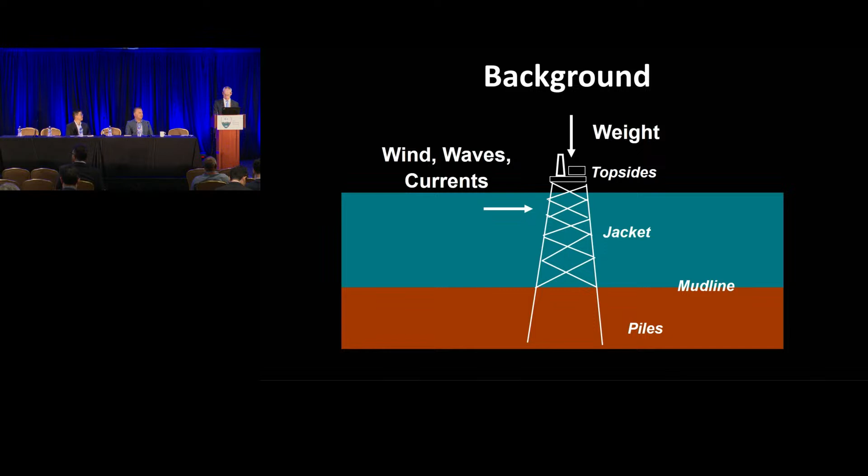Since 1992, we've had 6 hurricanes come through the Gulf of Mexico, passing through parts of the Gulf that had offshore oil and gas platforms located in them, and every one of those hurricanes had loads beyond the design load for these structures, so they're a great opportunity for us to learn how well these platforms perform.

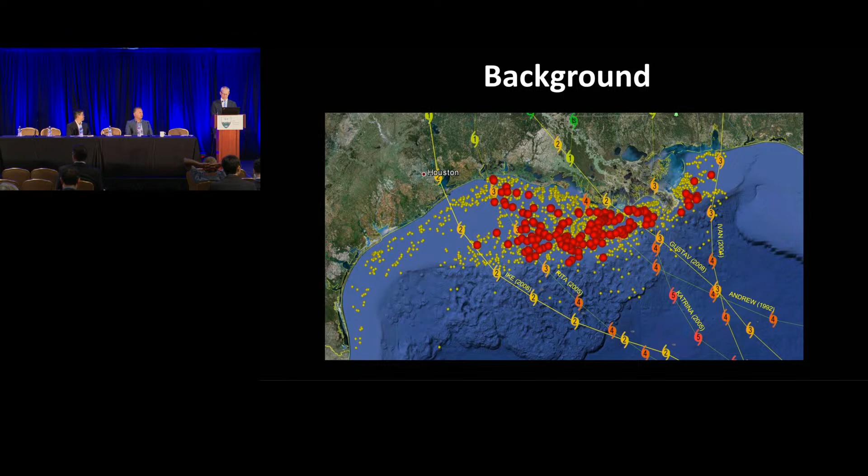So these are real failures, not notional failures. These are real failures. As many platforms as were destroyed, there are many more platforms that survived, even though they were loaded beyond what they were intended to be able to withstand.

So the whole goal of this is to learn everything we can from how these systems are performing compared to how we think they would perform based on design.

These structures are designed using 3-dimensional nonlinear finite element methods. We try to do the best we can in modeling the structure, modeling the foundation system, modeling the loads on these structures in order to design them.

Here's an example of some results from one of these finite element models. This is showing the capacity of the foundation system as an interaction curve. So if you're below that curve in a combination of base shear and overturning moment, in theory, the foundation system should be stable.

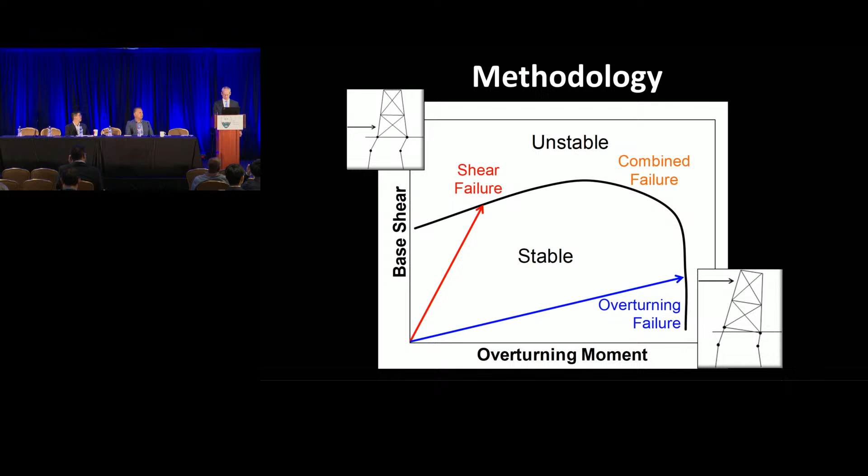Here's an example of a real case. This is a platform, an 8-pile structure that was located in Hurricane Ike in 2008. The red asterisk represents our best guess based on the hindcast data for that location as to what the maximum load was that that platform was subjected to in terms of base shear and overturning moment.

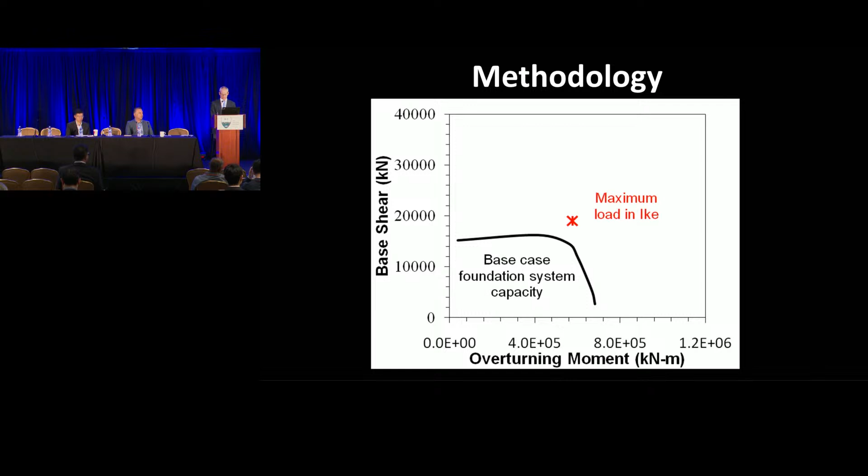And you can see where the black interaction curve is. Of course, the world is not deterministic, so each of those have a probabilistic representation, and what we would like to do is understand how what happened compares to what we think would have happened, and then to update our ability to predict the performance of these structures based on that information.

And we've got what we predict the capacity to be, using the state of practice, which is the three-dimensional nonlinear finite element modeling and all of the various models that we use for design of the foundations. We have random or aleatory variability in that capacity, so we're trying to account for that. Even though we predict what the capacity is, that doesn't mean we know exactly what the capacity is.

And there's potentially model uncertainties. Our models for, say, axial pile capacity are calibrated based on load tests, and none of those load tests have loads anywhere near the kind of loads that we have on these structures in a real hurricane.

So we're extrapolating pretty significantly from those, so there's some model, some epistemic uncertainty in what that capacity actually is. And the same thing on the load side.

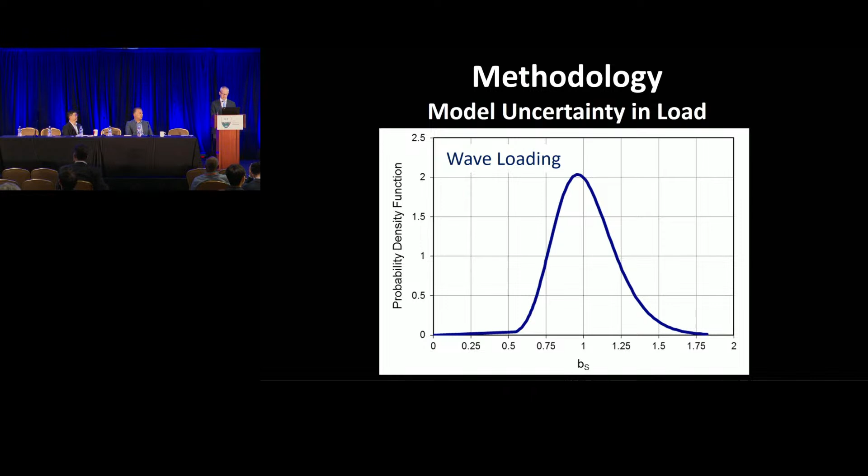And then the last step is to take what happened and update those prior distributions. Here's what that likelihood function looks like. There's about 20 platforms in different hurricanes with different modes of failure and different performances that were observed, which we're incorporating into this big equation that captures how likely it is that these observations would have happened for different sets of values of those model factors. There are 5 different model factors.

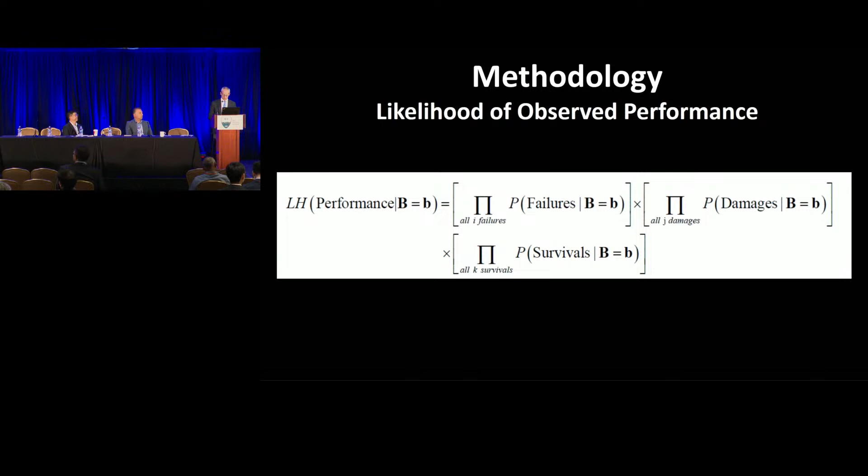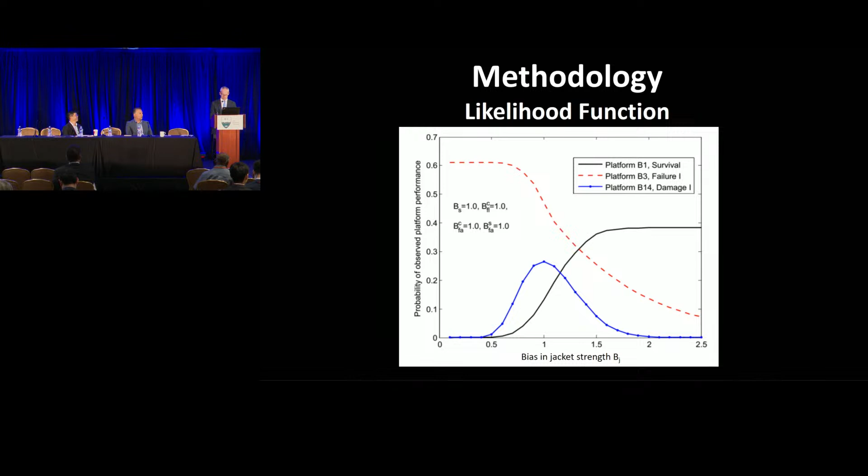And what we're doing is combining all of these together for all of the various modes, and then using Bayes' theorem to update those distributions for the model uncertainties.

But I want to point out that, remember, there's 5 factors here, and I'm just showing you one of them, so you really need to look at all of them together. Here's the jacket capacity, again looking at it all by itself. Again, we're learning more, but it seems to be about what we thought it was.

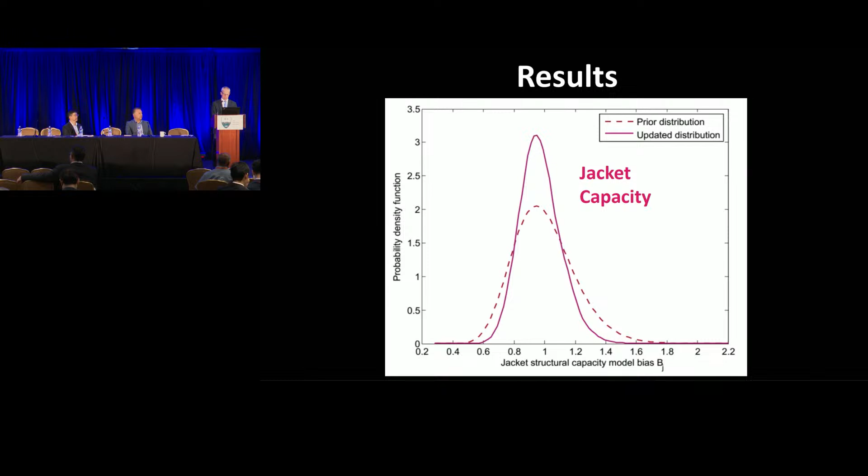Here's what we're most interested in as foundation engineers. This is foundation shear capacity. The data we have would indicate that the API method for modeling lateral pile capacity, and the way it's being used, is a bit conservative. And you can see how that updated curve has moved to the right, indicating that conservatism.

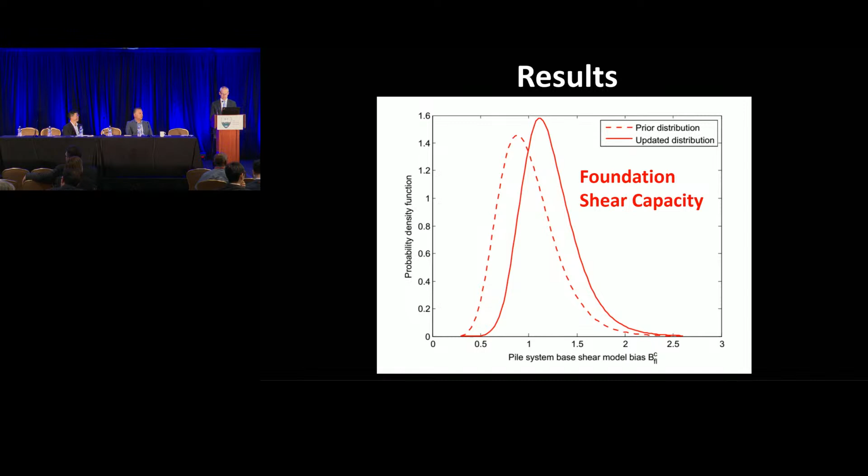Here's axial pile capacity in clay. In this particular case, it wasn't until 2008 that we finally had a failure of a pile in clay. It was a tripod, and we'll talk a bit more about the lack of redundancy in a tripod. But in that particular case, the capacity was almost exactly what we would have predicted based on the API method. It was a structure that had been out there for 5 years before it was loaded in the hurricane. So even after 5 years of aging, it still had a capacity about what we would predict using the API method. And that kind of information is reflected in that updated distribution for the bias. It's centered pretty close to 1.

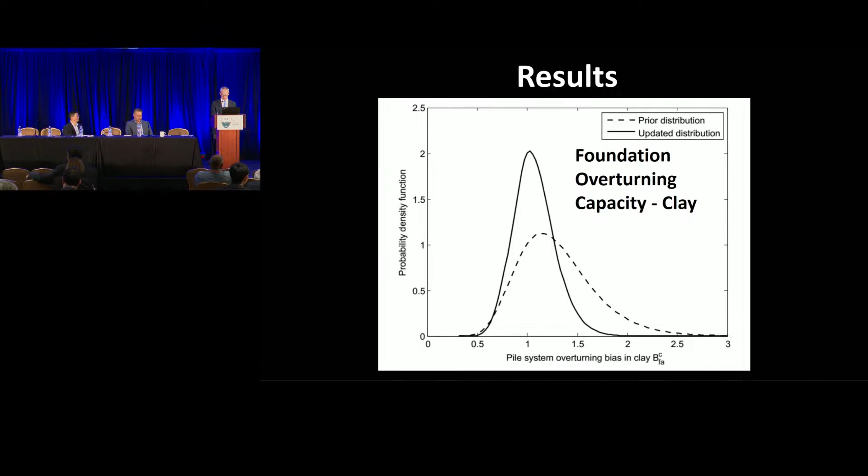I want to look at one of these cases in detail just to show you - you can look at it holistically like we have been, but every one of these is really a story in of itself, and the real value, I think, comes from looking at each one of these cases individually and understanding what happened. This is a structure that was loaded in Hurricane Ike. It's an 8-pile structure. The interaction curve would indicate, based on the standards, the state of practice, we would predict that this platform should not have survived that hurricane. It should have failed in the foundation. It did not fail in the foundation. It was still standing at the end of the hurricane.

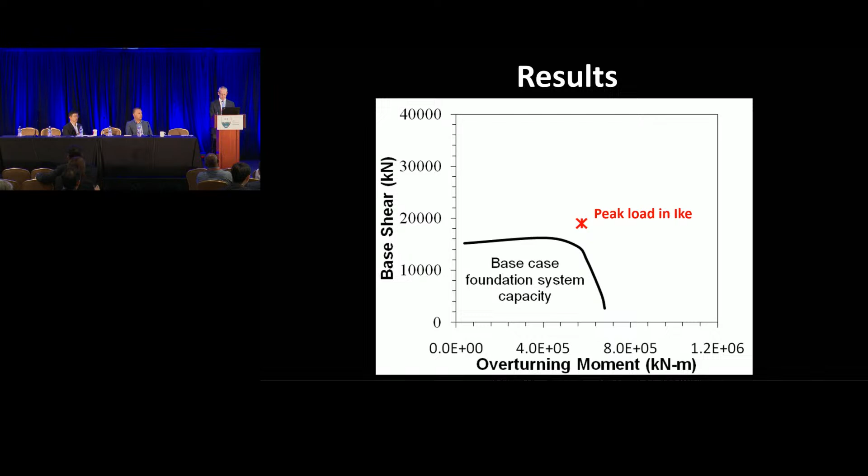So the structural engineers, when they first went to assess this platform - anytime a platform has seen something close to its design loading conditions, you have to go through an assessment process before you can put that platform back into service - in order to explain this platform having survived the hurricane, they took the geotechnical data from the site investigation and the design, and they multiplied the undrained shear strength by 3. So it would have taken like $1 million to drill the boring and do the geotechnical work and produce the report for this, and the structural engineers just multiplied everything by 3. In doing that, they could explain why the platform survived.

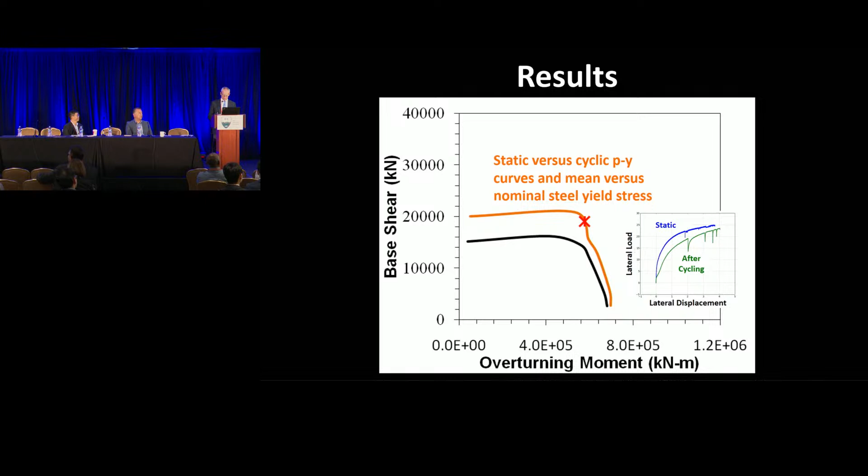But if you look carefully at this structure, first of all, they weren't using the lateral PY curves appropriately for an ultimate pushover. They were using PY curves for cyclic loading, which are really for stiffness, not for ultimate capacity. They were using a nominal yield stress for the steel of the legs and the steel pipe piles of 36 KSI, when we know, we've done lots of measurements of coupons, it's closer to 42 KSI. And so if you account for those two things, you can explain why it survived. And then if you even go further, the structural models have the structure starting at the mud line, and in reality, the legs stick down about 2 meters or 6 feet below the mud line in this structure. And if you account for those leg stubs, you can explain why this structure survived that hurricane without doing anything in multiplying the strength of the soil from the geotechnical site investigation.

So the impact of this kind of work - one is it's motivated updating methods to predict lateral and axial pile capacity. These are now being, some of them have already, some are in the process of being integrated into the offshore practice. I expect, and I already know because I'm seeing it happen, that these are going to show up in AASHTO and other design guidance that we use for all sorts of foundation applications.

Number 2, we've explained why foundations are less likely to fail than superstructures in a hurricane. There was a storyline after Hurricane Andrew that continued on until about 2010, that these platforms were over-conservative in the foundation, that geotechnical engineers were not doing a good job of design. They were being overly conservative.

That's not true. The design methodology, in the way it goes component by component and doesn't look at the whole system, it turns out that leads to, for structures that have more than 3 legs, and most of these platforms have 4, 6, or 8 legs, it's much less likely it's going to fail in the foundation just because of the design recipe.

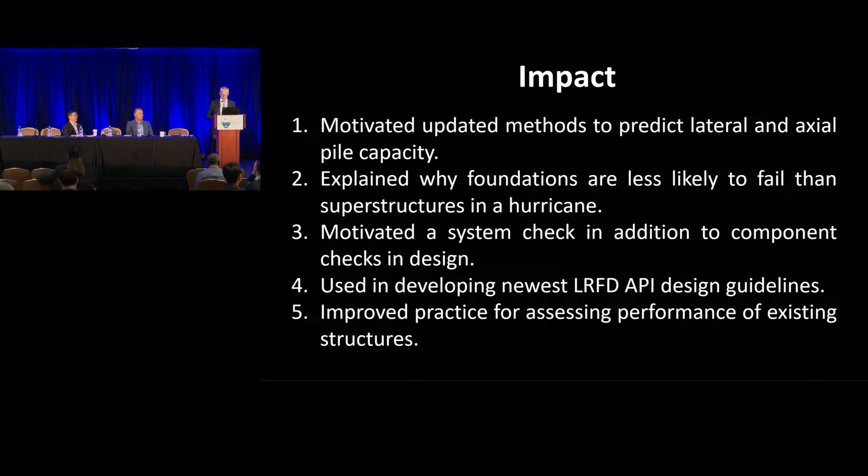Lastly, right now we're working on going beyond what we've already done. There's work in Europe that's hypothesizing that waves are bigger and are creating bigger loads for the same wave height than what our design methods would predict. This is important not just for these offshore structures, but for all of the offshore winds and for all the coastal facilities around the world. If we were to say the waves are bigger and stronger, that's going to have a huge impact.

So we're looking back now at this work and we're being more specific. Like this structure here, we can see that it was hit by a wave, but it wasn't a wave that was much higher than those damaged members, and it wasn't much lower than those damaged members. So we can be more informative in our likelihood function on the waves in order to learn more about both the loading and the capacity of these structures. Thank you very much.

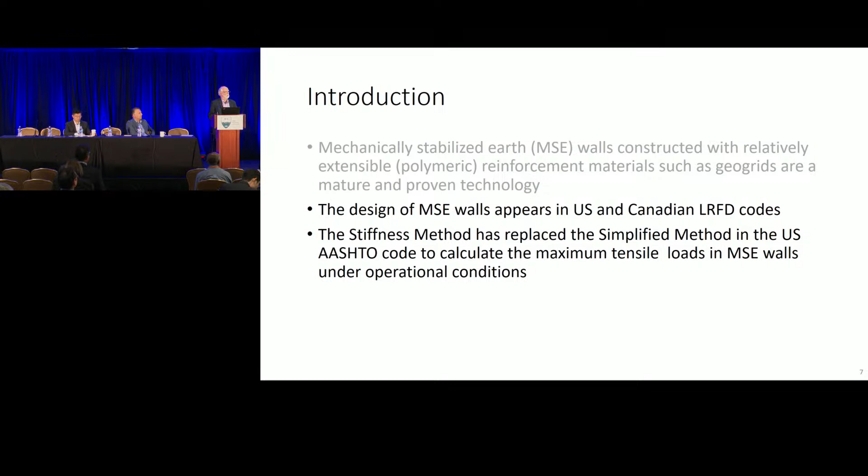Now, the design of MSE walls appears in US and Canadian LRFD codes. The stiffness method recently replaced an old simplified method in the US AASHTO code, and this is the method used to calculate what the maximum tensile loads are in the reinforcement layers under operational conditions. So at about the time this work was done in the US, you folks were moving from the simplified method to the stiffness method. The stiffness method is a paradigm shift in our appreciation of the mechanics of the performance of these MSE walls, because it recognizes that it's the stiffness of the reinforcement that controls the loads and not the strength of the reinforcement.

The motivation for this work, at the time of writing about 4 years ago, was that load and resistance factors appearing in codes in Canada and the US for internal stability design of MSE walls were determined by backfitting to allowable or working stress design, essentially backfitting to classical factor of safety approaches. Hence the objective of US and Canadian LRFD codes to meet a minimum consistent margin of safety in probabilistic terms was not satisfied - we're not satisfied when a limit state function was just satisfied.

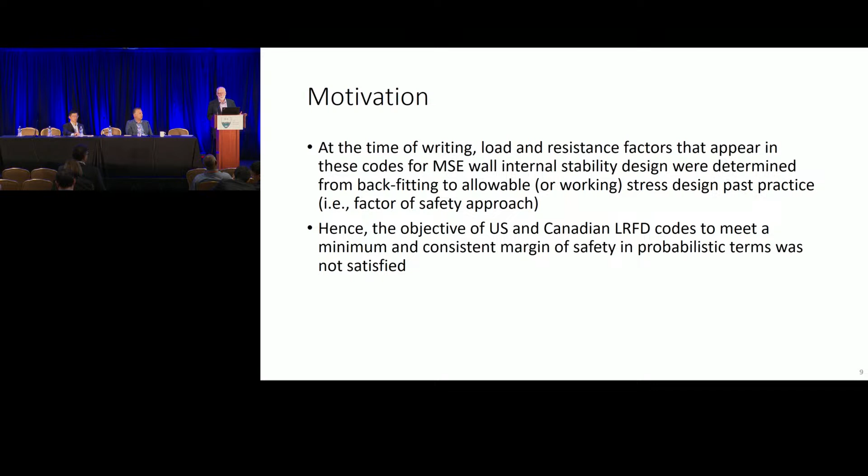So the objectives of the work were to carry out rigorous reliability theory-based LRFD calibration for the internal stability of these systems, and from that work to provide resistance factors to be used in the AASHTO code and also in the Canadian Highway Bridge Design Code.

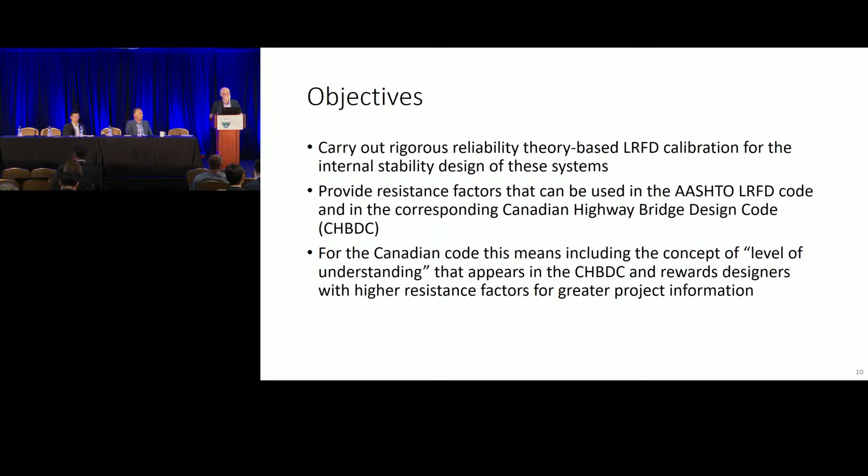We had our foot in both camps because we wanted to make sure both codes were in sympathy - if you built a wall right on the border, you'd basically have the same animal. The interesting thing about the Canadian code, which distinguishes it from the AASHTO code, is that it includes what we call the concept of level of understanding. This appears in the Canadian Highway Bridge Design Code specifically to reward designers with higher resistance factors for limit states when they have greater information.

So that's the terms, and the limit state function can be formulated in a conventional LRFD format - the nominal resistance is multiplied by a resistance factor, which we expect to be a number of 1 or less, and the load is scaled up using a load factor which is 1 or greater. The objective of LRFD calibration is to determine the magnitude of that resistance factor.

So in order to carry out calculations for each limit state, we need a performance function that we can connect to calculations for probability of failure or reliability index. Here you see the performance function, where Rn and Qn are respectively the nominal resistance you would use in your calculation as a designer, and the nominal load. Also shown are model bias values.

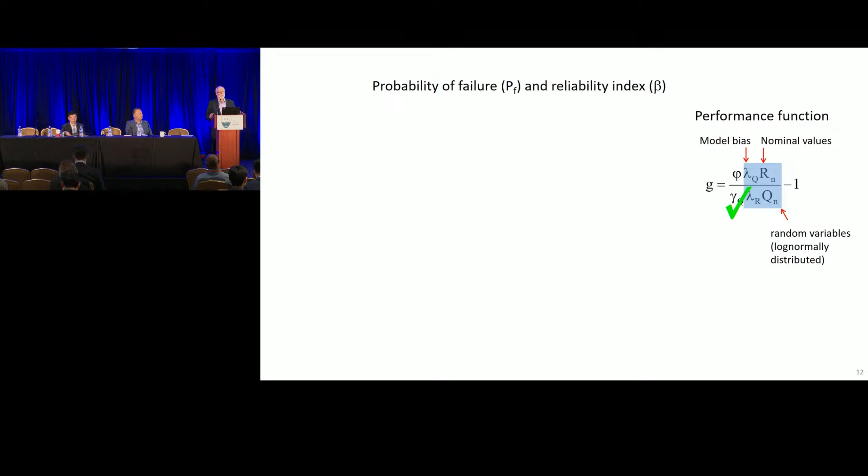So if I presume a value for the load factor, which I pretty well have to do, I can use Monte Carlo simulation, and for an assumed target trial value of resistance factor, carry out lots of Monte Carlo realizations and calculate the probability that this performance function will be less than 0. This allows me to quantify probability of failure or reliability index, as you can see in this plot.

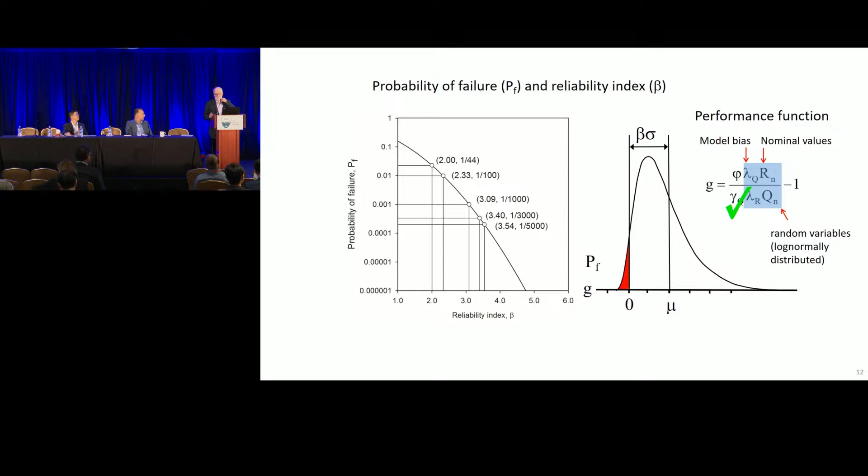So the question you might want to ask next is: what is a reasonable target probability of failure or reliability index? On this plot, you see a well-known plot for probability of failure versus reliability index. For these limit states, we use a beta of 2.33, which is a probability of failure of 1 in 100.

Sometimes this scares people, but you have to remember that these MSE walls are highly strength redundant - if one reinforcement layer fails or misbehaves, there are other layers that can compensate. That's why we use what may appear to be such a low value.

So like I said, we can carry out Monte Carlo simulations. However, it turns out that if we assume these bias values and nominal values are log normally distributed, there is thankfully a closed form solution we can use to calculate beta if we were doing an RBD analysis. And LRFD calibration is a heavily constrained subset of reliability-based design.

In this formula, which may look a little frightening, there are a collection of terms that I've conveniently color-coded. The green terms refer to uncertainty in the estimate of the nominal load and resistance terms at time of design. The yellow terms are uncertainty in the accuracy of the load and resistance models, the so-called bias. And then there are correlations - bias dependencies between the accuracy of the model and the nominal values you predict using, for example, an analytical equation.

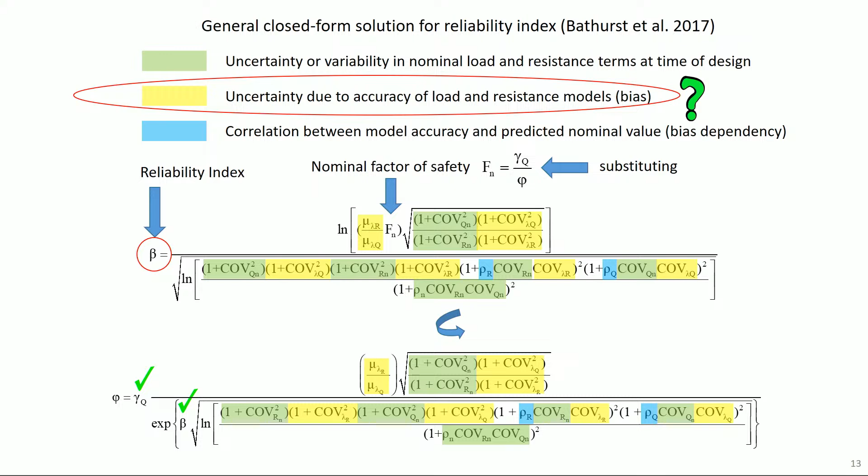So first of all, how do we calculate or get estimates of these bias statistics? Well, for the load side, we went out over a number of decades and collected from instrumented reinforced soil walls measured loads in the reinforcement. So those are the measured Tmax values that you see here in this equation. And then we simply divided, for the same conditions, the predicted maximum value.

That ratio is called bias. And then we collected the statistics for all of these bias values. We calculated the mean, and we calculated the spread as a COV. And you can see that for the statistics on the load side, the mean bias is about 0.96, which means for this model, it's not a bad model. And the spread is about 36%.

And when you plot this data on a CDF plot with a log bias scale, it's fairly linear over most of the distribution, which is visual evidence or support for our basic assumption that these bias values are log normally distributed. And then for the resistance side, we did a similar approach.

So for the pull-out limit state, we collected a fair number of pull-out box tests with geogrids and with granular soils, and we did the same calculation. For every pull-out box measurement, we divided that value by the predicted value using the pull-out capacity model we wanted to calibrate our limit state with. Here is the equation that appears in AASHTO.

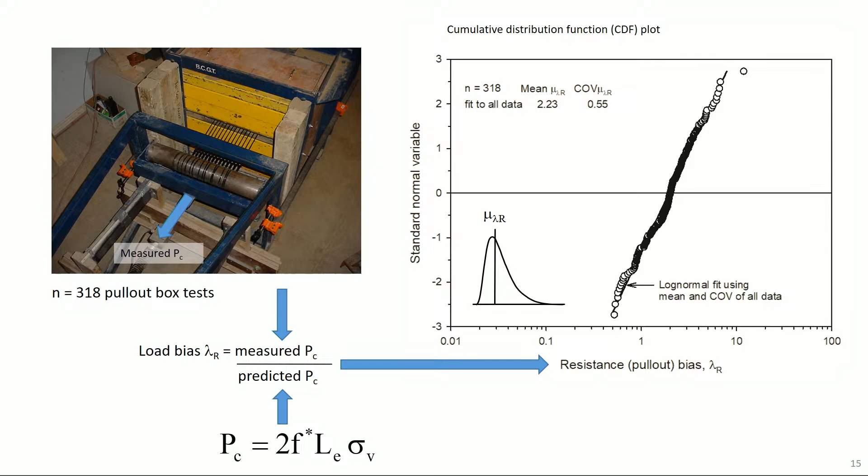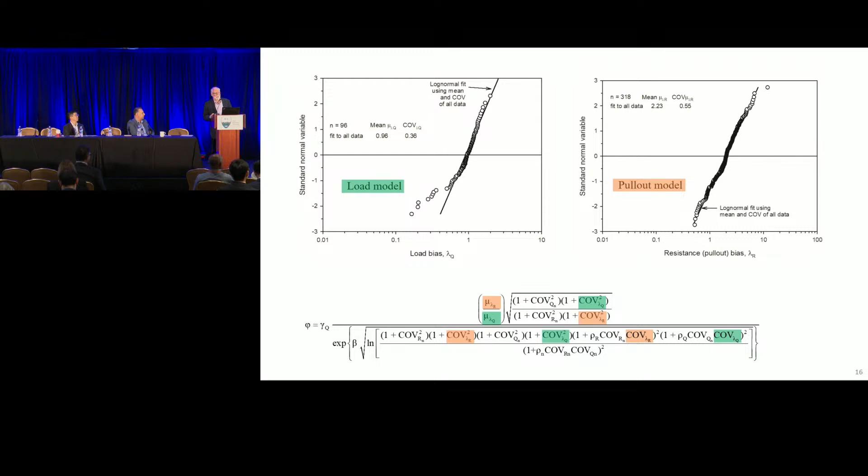So now we have the load model statistics on the left and the pullout model statistics on the right. And what we can do is put them into this equation. But there are also a couple other terms here that we need to look at - terms that I've color-coded in the equation. These are the correlations between the model bias and the predicted value.

So what it means is that if you look at the load plot on the left, the accuracy of the model is reasonably independent of the magnitude of the load you calculate. However, on the resistance side, the accuracy of the pullout model is very dependent on what the predicted value is. Now, this is fairly undesirable, but it's a reality. However, we can accommodate this bias dependency analytically within this closed form solution I introduced earlier.

So now let's look at - we've talked about bias statistics. Let's talk about the nominal values. Anytime we do a calculation at design time, the project conditions will have some uncertainty. And we can, using this approach here, include that uncertainty at time of design.

This can be argued as a method of injecting human experience into probabilistic-based design. And in order to arrange our thoughts in this regard, we went to the Canadian Foundation Engineering Manual, and in that manual, whenever you are doing a design, you can classify that design as falling into one of

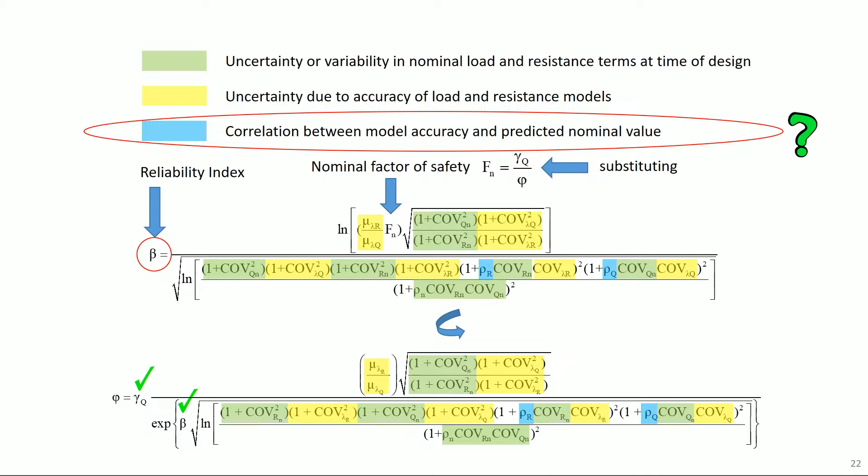Now, there are potential correlations between model accuracy and predicted nominal load, as we mentioned before, and those are shown again at the bottom, you can see those blue points. But there are also other forms of correlations, and this includes the possibility of a correlation between the nominal load and the nominal resistance.

In this particular example, you can see that there's a significant negative correlation between those two quantities. And the utility of this is that I can include that in this equation, and it can have a big effect on the magnitude of the resulting resistance factor.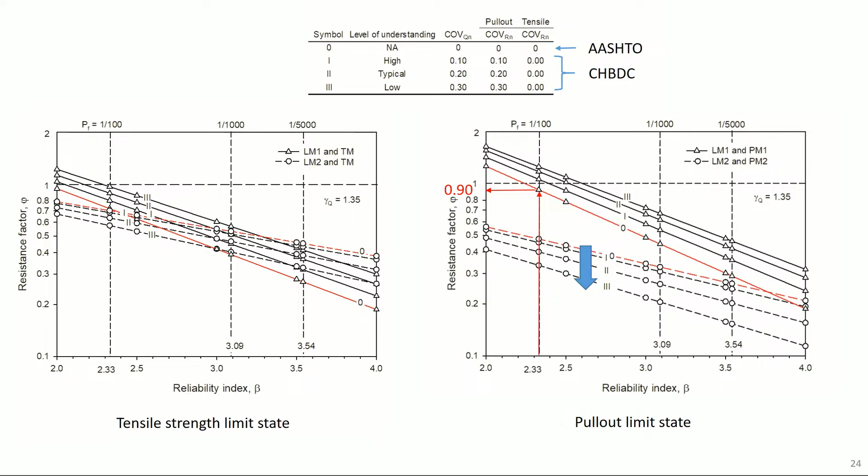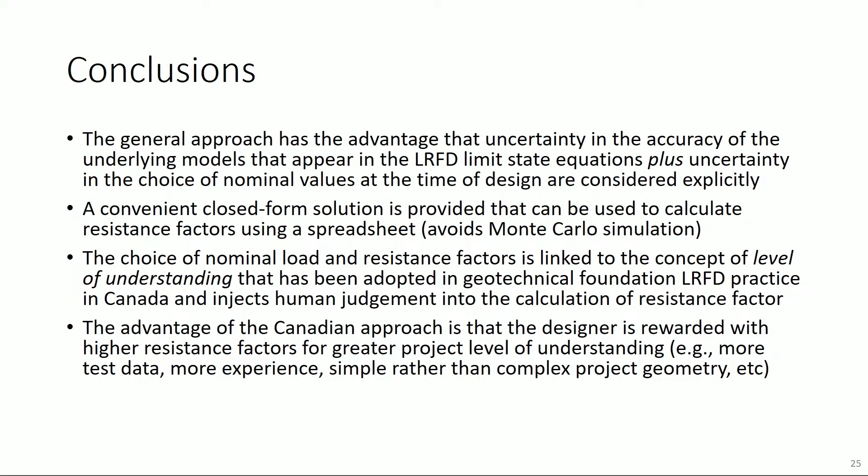So in conclusion, what this paper has shown is that this general approach has the advantage that uncertainty in the accuracy of underlying models appearing in LRFD limit state equations, plus uncertainty in the choice of nominal values at the time of design, are considered explicitly. A convenient closed-form solution is provided that can be used to calculate resistance factors using a spreadsheet.

No Monte Carlo. My experience with practicing engineers is that as soon as I mention Monte Carlo, their eyes glaze over. But they all know how to use a spreadsheet.

The choice of nominal load and resistance factors is linked to the concept of level of understanding, and this has been adopted in geotechnical foundation LRFD practice in Canada. As I mentioned before, it injects human judgment into the calculation of resistance factor and avoids a complaint geotechnical engineers sometimes have about probabilistic-based design and LRFD calibration—that you remove the human. Well, the human is back.

The advantage of the Canadian approach is that the designer is rewarded with higher resistance factors for greater project level of understanding. So if you have more test data, you have more experience. If you have a simple rather than a complex project geometry, we can accommodate that using this concept of level of understanding.

So the paper has tables of load and resistance factors for tensile rupture and pull-out limit states, and there are other papers we've written with tables for other limit states. These can be used by LRFD code writers in the United States and Canada for future revisions of the AASHTO 2020 specifications and the Canadian Highway Bridge Design Code. In fact, the values we calculated for the stiffness method are currently in the 2020 LRFD code.

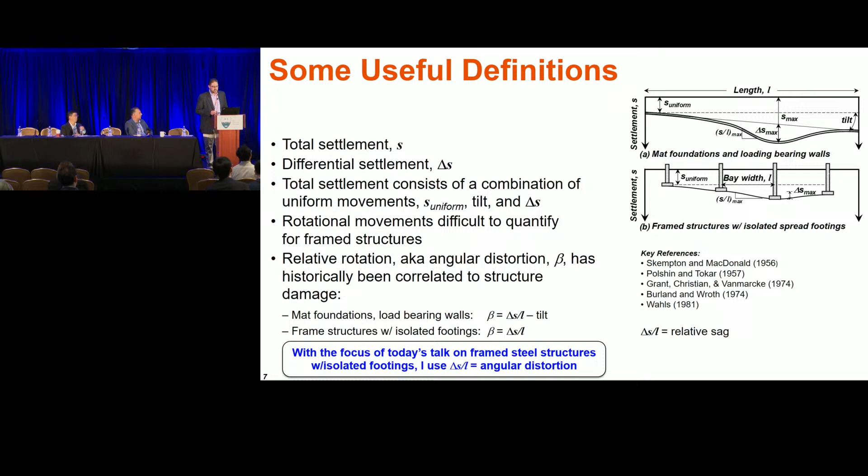Now, I think we all understand and appreciate the effects of differential settlement on structures. However, estimating what the differential settlement actually may be in terms of its magnitude is a challenge. On the design side, for the geotechnical engineer, it's often the fact that the quantity of loads or their distribution may change throughout the design process, and the geotechnical engineer needs to provide recommendations well down in that workflow. But more commonly, perhaps, is the case of an incomplete model of the subsurface, and that introduces the effect of spatial variability, which is the topic of many excellent talks at this presentation that I've enjoyed viewing.

Now, because of the challenge of estimating differential settlements, we often design to limit total settlement, knowing that differential settlements are some portion of total. And if we can limit total, then by virtue of that, we should be able to limit differential settlements. So for various limit states - and we'll consider three throughout this talk - ranging from the allowable limit state, which is a state at which we expect no loss in service to a particular structure, no noticeable cracks in partitions or wall panels, we have historically used something like an angular distortion of 1/500.

As we approach different limit states, such as a serviceability limit state, we now may have some interruption to service, utility connections to a structure. We may begin to see cracks or other inconvenient but largely cosmetic damage to various structures. Instead, the ultimate limit state is now the most severe limit state that we tend to consider. It's associated with cracking, potentially severe, to plastic hinging in reinforced concrete structures, yielding in steel beam structures or columns.

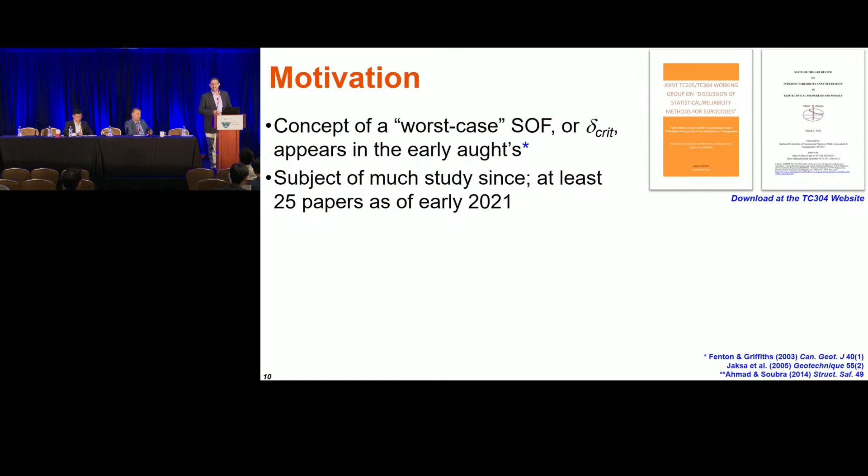At TC 304, when I served as vice chair along with Chair Jianye Ching, we had a variety of different studies summarized in excellent reports available for download at the TC 304 website. You have to look through the news items for the releases, but you can download these reports. Both of these reports perform a wonderful survey on this idea of a critical scale of fluctuation, a concept many of us have been thinking about for about the last 20 years or so.

A number of these 25 studies focus on differential settlement, and many make important discoveries, particularly that by Ahmad and Soubra on the effect of anisotropy in the autocorrelation length scale. One of the main findings is that the critical scale of fluctuation, that autocorrelation length that maximizes the probability of exceeding a limit state, tends to be between one half to one times the bay length, or the distance between the footings. That's been a pretty consistent outcome of these studies.

However, I'd point out that the vast majority were conducted using linear elastic constitutive models for the soils. Some other studies have used linear elastic perfectly plastic models so that at least some failure state can begin to propagate and perhaps connect through locally weak layers. But they've all largely focused on independent footings such that there's no SSI, that is soil structure interaction, or frame action for a particular structure.

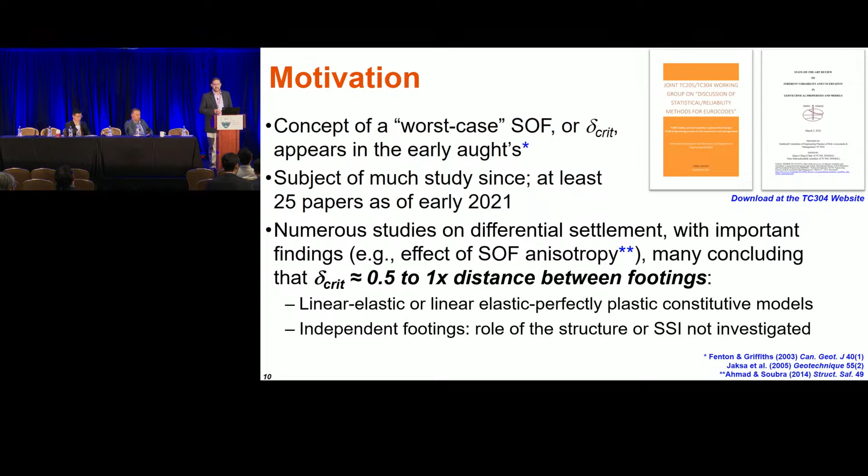I will present, and I'll be a little bit light on the methodology, which is unfortunate. I think it's interesting, but I want to respect the time that's been granted to me here, so I'll refer you to the paper for some of the dirty details. After presenting the deterministic responses between assessments that include independent footing responses versus coupled responses, that is, including soil structure interaction and frame action, I'll then walk through some interesting findings from the probabilistic viewpoint.

Briefly on the methodology, we were mostly focusing on construction-induced differential settlements, so we're talking about addition of gravity loads as we add floors, and the main governing deformation mode is driven by deviatoric strains. This represents the immediate settlement deformation standpoint. We didn't want to run finite element simulations of consolidation because of the amount of simulations we had to do, so we selected a stiff over-consolidated soil in which the loads would not exceed the pre-consolidation state, and that allowed us to proceed under this framework.

Our uncoupled analyses allowed us to calculate differential settlement and angular distortion readily, quite straightforward, and provided a baseline for comparison to previous studies. When we move to the coupled analyses, we bring in the soil structure interaction at the footings, including passive restraint at the vertical faces of the footings in addition to bearing resistance. We're accounting for rotational responses, and we can track the redistribution of shear and flexure through the structure in an emergent manner, that is, the response evolves as the demand increases. Then we can make statements about the ultimate limit state of the structural members in addition to structural ultimate limit states implied through angular distortion.

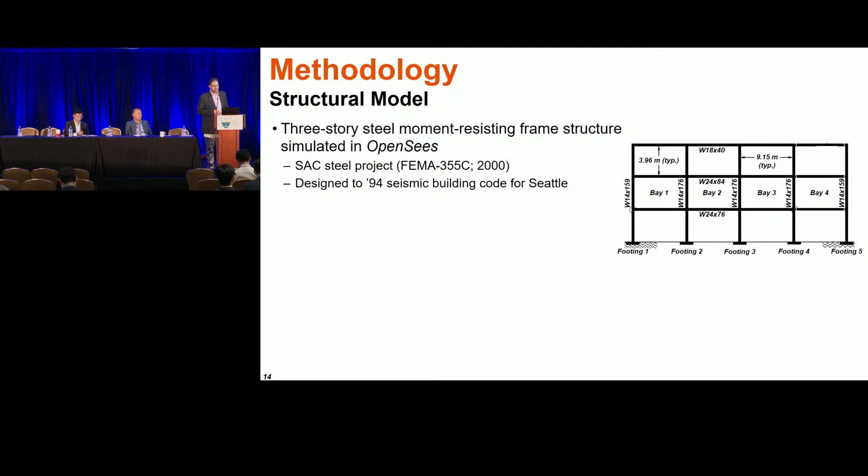As you can see, the structure has 4 bays, with spacing of approximately 9 meters between the bays.

Bays 1 through 3 use moment resisting beam column connections. Bay 4 has a hinged beam column connection. The structure has been designed using typical strong column, weak beam systems with ductile behavior.

We have an appropriate damage model that allows moment rotation responses to go from yield to ultimate to degrade to some kind of residual resisting moment. Our columns are modeled using relatively simple force-based fiber section finite elements acting as the strong column, and our weak beams are modeled using finite length plastic hinge beam column finite elements.

Down at the bottom of the structure, we're going to simulate our footing response using nonlinear Winkler foundations. For foundation springs, we use 100 springs per footing at the bottom for bearing response, and we capture nonlinear passive resistance, allowing us to capture rotational effects and tilt.

Just for brevity, both of the foundation SSI models will draw from probabilistic undrained shear strength distributions, which are seeded into our random fields that are extended below the foundation in order to account for an additional sense of probabilistic performance. Note that we're using a relatively small factor of safety of 2.5 compared to the typical 3.0.

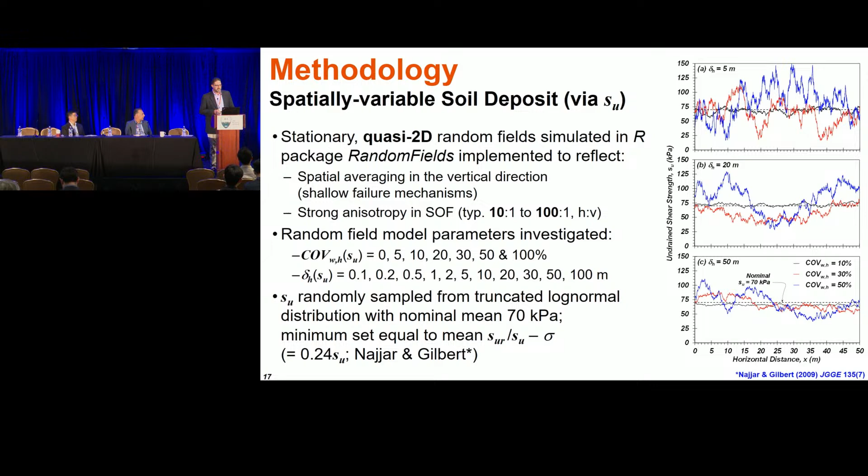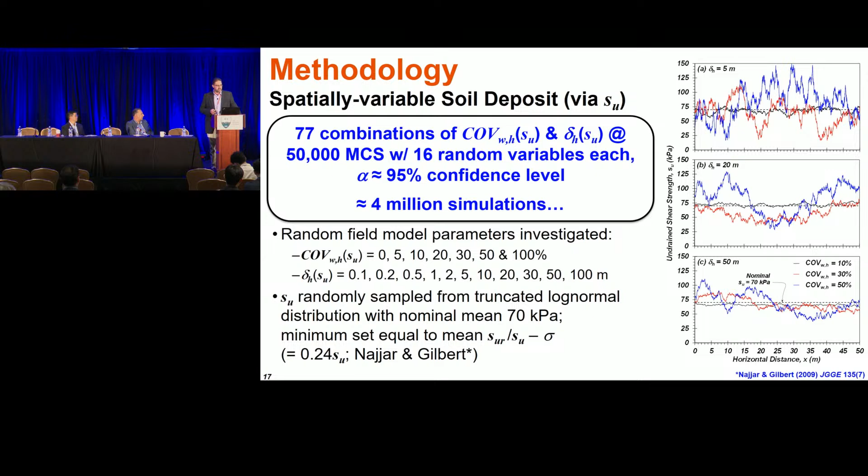However, I just want to point out that with 77 combinations of random field model parameters, each simulation having 16 random variables, and with an appropriate confidence level, we're talking about 4 million simulations and about 1 year of runtime on 2 HPCs. So keep that in mind as we go through the results.

Now the focus is on probabilistic responses, but we need to understand the deterministic response in order to make some statements about the impacts of spatial variability in the foundation soils.

I've got a view, and you'll see some of these diagrams later on, of our structure. Note that we've got footing widths that vary across the footprint as shown, again sized identically using a factor of safety of 2.5. The footing widths are a little different because the column loads are different.

Column loads are lighter at the exterior of the structure, and there are more tributary sources of load on the interior, so those increase just a little bit. It is that distribution of load that drives the differential settlements and angular distortions distributed below the structure. In general, the maxima of differential settlement and angular distortion tend to occur at these outer bays because of that difference in load distribution, which is quite realistic.

But in general, even with this factor of safety of 2.5, we're on average a little bit larger than our typical 1 inch of foundation movement using our nonlinear foundation bearing response model.

So now let's compare the uncoupled response, where we're just computing deformations assuming no soil structure interaction whatsoever, but we still have a nonlinear bearing pressure response.

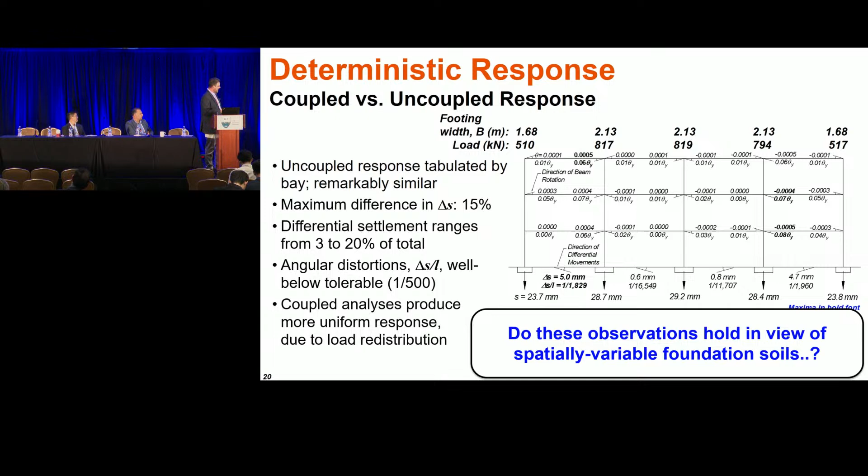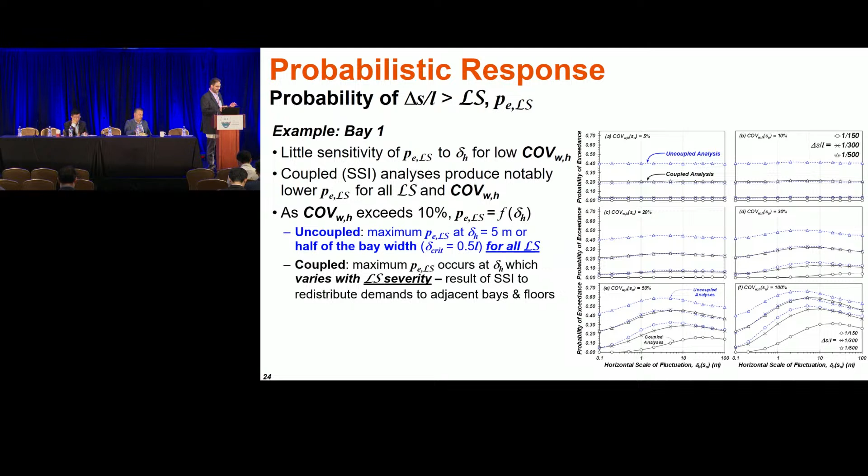When we look at the coupled responses, the maximum probability of exceeding any given limit state now begins to vary significantly with limit state severity. This is a result of SSI and frame action responding favorably to redistribute shear and flexural demands, leading to particularly lower probability of exceedance in terms of angular distortion.

One thing you can notice is that at very low scales of fluctuation, spatial averaging of the strength governs the system response—this is the local minima in probability of exceeding any particular limit state. On the other end, we also have a local minima, not as low, where spatial averaging governs, but it turns out the physical mechanism driving this effect is that the entire structure tends to tilt more often rather than have differential movements within the footprint of the structure. So we're seeing mechanisms within the foundations and within the structure that are prescribing the response in terms of critical scales of fluctuation and maximum exceedance probabilities.

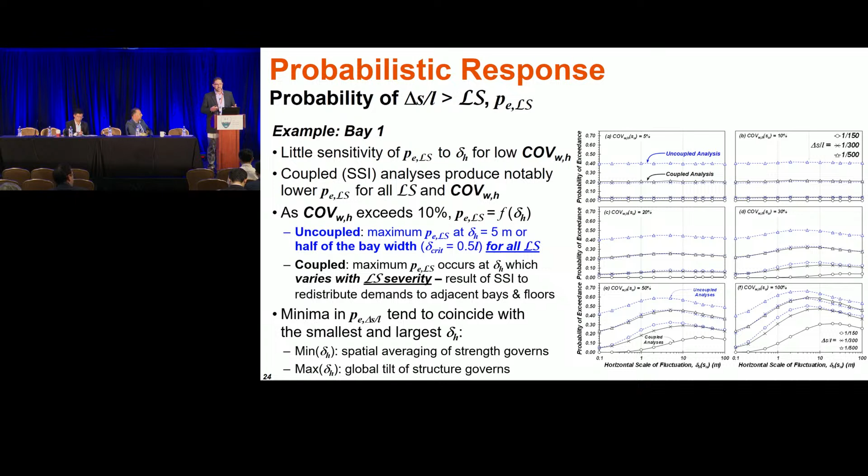So let's just quickly synthesize some of these observations. We see a reduction in the probability of exceeding a limit state that occurs due to SSI and increases with limit state severity or demand.

But keep in mind those previous graphs, there's a bit of a plateau at these maximum exceedance probabilities. The critical scale of fluctuation is not a precise parameter, but rather the structure responds more smoothly, with exceedance probabilities approaching this critical case over a larger range of autocorrelations than one specific precise manner.

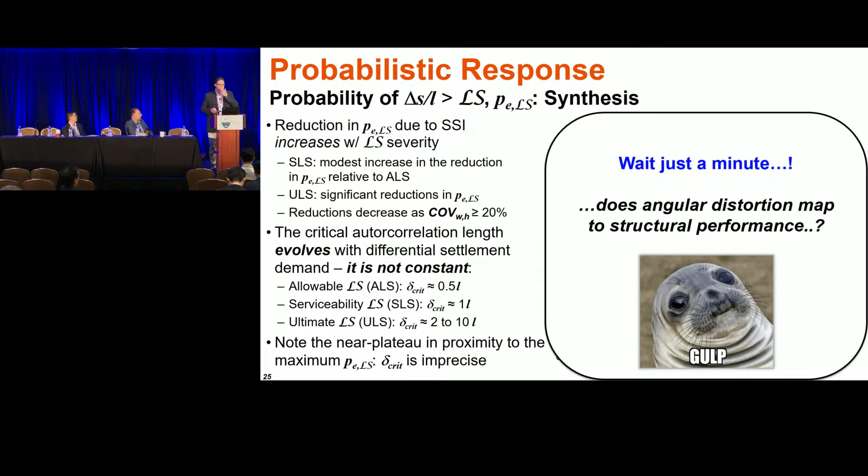So now let's look at the probability of beam yield, that is the beam rotation exceeding the beam yield rotation. Before we look at the graph, let me summarize our basic observations. Floors 2 and 3 exhibited basically similar responses, even though floor 3 had a lighter wide flange beam section. Floor 4 exhibited the best performance, it had the lightest beam section, but it was furthest removed physically from the demand in terms of foundation movements from spatially variable soils.

We see that inner bays are less sensitive to spatial variability than outer bays, because they're able to redistribute to the left and the right rather than just having one adjacent bay to redistribute the demand to. But now if we turn to the probabilities of exceeding the beam yield rotation, let's look at all of our Monte Carlo simulation results, which are in red.

The exceedance probabilities are 0 for inherent variabilities less than about 20%, so no chance of yielding these beam sections across all Monte Carlo simulation results. But we can condition our simulations based on exceeding one of these angular distortion-based limit states, and when we do that, we have to have increasing soil variability to see meaningful occurrences of beams yielding structurally. But the probability remains particularly low.

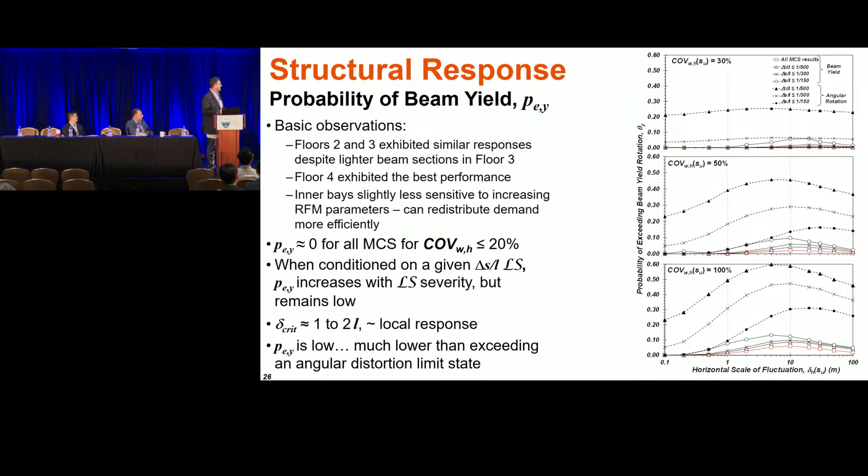How low? Well, we have to change the vertical scale in order to show how low. So this is the structural ultimate limit state probability, and we can compare that to the angular rotation ultimate limit state probability of exceedance. They're very, very different, frequently off by a factor of 10.

So we might conclude that the angular distortion limit states set forth in many codes, developed based on observational studies, really don't tend to map to our modern, or even pre-94 or 94 era steel frame structures. What about other structures? I don't know, we didn't look at other structures. But I expect that unreinforced masonry, which are much more brittle, may be more well aligned with these current angular distortion-based limit states. Reinforced concrete structures are probably somewhere in the middle, but we don't know.

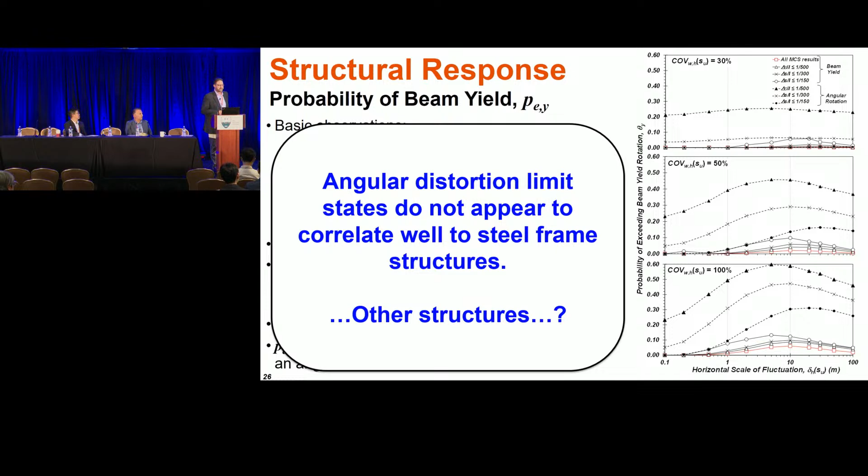To conclude, this is one of the last slides of content here. Let's look at the system response.

Many of the talks we heard about this afternoon focus on systems, and I think we need to spend more time working with our colleagues in different disciplines to understand system responses. So let's just take a moment to do that.

I've drawn an example for autocorrelation length that's about half of the bay length with a fairly aggressive amount of variability in the subsurface. I've got the median angular distortion case from our Monte Carlo simulations, the median plus 1 sigma, or 1 standard deviation, and then median plus 2 sigma, just to see if we can link system responses as a function of where we fall on the distribution of angular distortions computed as part of these simulations.

What we see is that for the median case, the largest beam rotations, shaded here, occur in the bay not where the angular distortion is greatest, but where we have the greatest gradient or change in differential settlement and hence angular distortion. But for the median case, we're not even approaching 50% of the yield rotation in our beams.

If we look at the 3 cases in sum, it's the median angular distortion plus 1 standard deviation case that produces the largest beam rotations, not median plus 2 standard deviations. In fact, the largest beam rotations occur in the bay in this scenario with the best angular distortion. Here we're looking at maybe 93% beam rotation as a percent of yield, but it's the adjacent bays which are exceeding the ultimate limit state in terms of angular distortion. But if you look carefully, the beam rotations are decaying as a function of distance from this large demand or gradient in differential settlement.

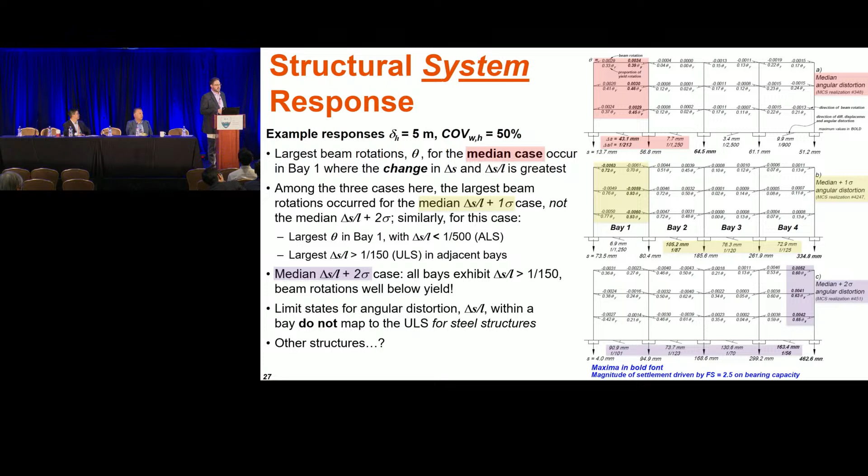So maybe we need to rethink the way we identify poor performance, but we also need to look at different systems to see how that system response changes. So thanks so much for your attention.

I've just got a couple of concluding remarks. I think one of the key findings of our work is that the system will continue to work hard and harder to redistribute shear and flexure in the face of increasing demand. And so this idea of a critical scale of fluctuation, it evolves along with the severity of the demand imposed upon the structure. There are differences in the critical scale of fluctuation based on what element or component of the system we're looking at.

It's clear that neglecting soil structure interaction and frame action leads to errors in our conclusions. And clearly the benefit of SSI increases with structural demand, and that's good news for us. I hope you enjoyed the talk. There's lots of details that I skipped over. I invite you to review the paper. I need to thank my great colleagues and co-authors that made this work possible, and also for your attention.

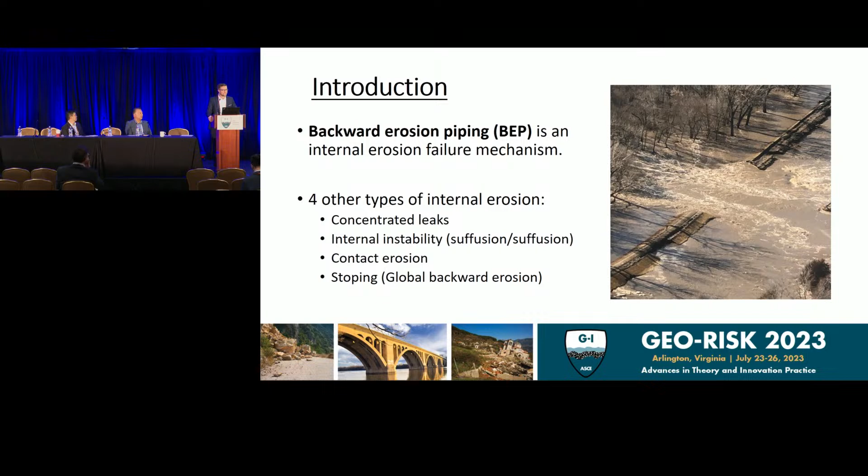So I'm going to talk today about developing a new approach for predicting backward erosion piping. Backward erosion piping is an internal erosion failure mechanism. There are four other types of internal erosion that we treat separately: concentrated leaks, internal instability — often you'll hear the terms suffusion and suffosion used — contact erosion, and stoping, or global backward erosion. I don't really like that phrase because it causes confusion with backward erosion piping, so I'll just call it stoping.

I wanted to highlight that because there's been a lot of confusion in the literature over the last 100 years on what these are, and it's just as important to know what we're not talking about as it is to know what we are talking about.

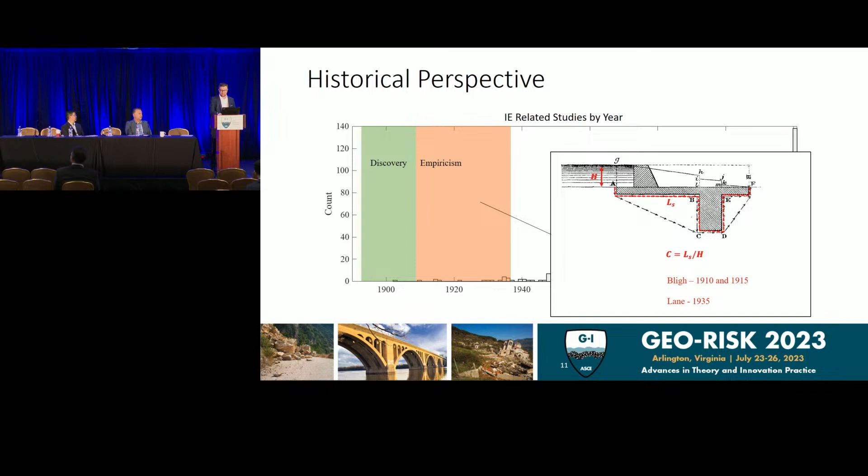In the early 1900s, there was an era of empiricism where creep ratios that I'm sure you've seen in your undergraduate soil mechanics books were used to predict whether or not a dam would be safe against piping. At that time, everything was lumped together and just called piping. These creep ratios just look at the seepage length versus the safe head that could be applied to the structure.

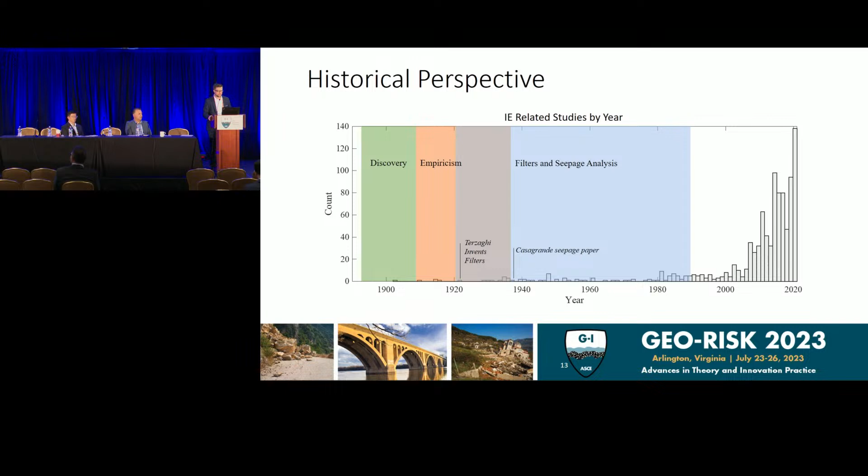After that, we had an era of filters and seepage analysis. This was kicked off by Terzaghi inventing filters in 1922 and patenting it, and Casagrande really drove home the concept of using seepage analysis and filters to design dams safely in 1937. At that time, we thought we had this figured out, and we know now that you can safely design any structure with filters, and that's what our default position should be. But there are a lot of structures that do not have filters, and a lot of structures we cannot afford to build with filters economically.

During that time period, there were some very significant failures around the globe that prompted backward erosion piping research in the Netherlands, Germany, and the US, which brings us to the last stage, where you start to see an uptick in research because of those failures in the 80s, and that continues today. Even with all of that, it was not until 2007 that the different mechanisms were clearly defined, and we started to tackle all those problems completely independently.

So now I'll just highlight a few observations specifically about backwards erosion piping that we can draw from all of the work that's been done. First, and perhaps most obviously, backwards erosion involves pipe flow and flow through porous media. As a result of this, flow concentrates from the soil to the pipe because the pipe is more conductive, resulting in a nonlinear head profile near the pipe tip.

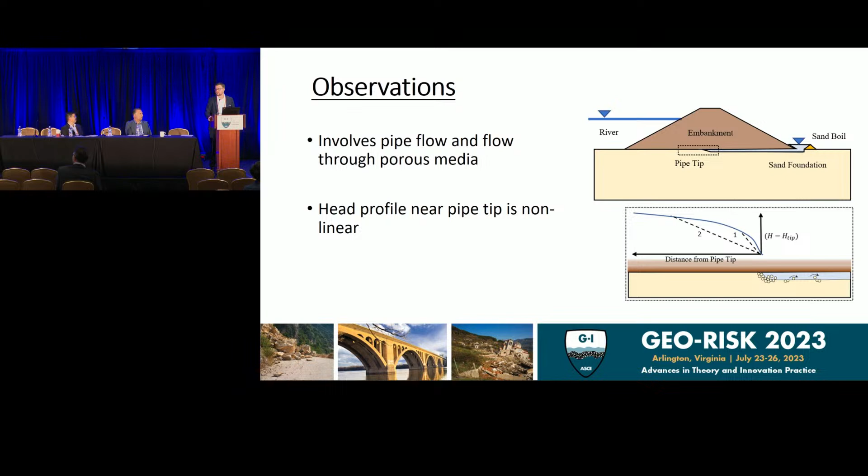This is very important because if you look at different distances in front of the pipe, you will have different gradients or velocities or whatever flavor of hydraulic loading you want to use to quantify what's happening. We'll come back to this multiple times throughout this talk.

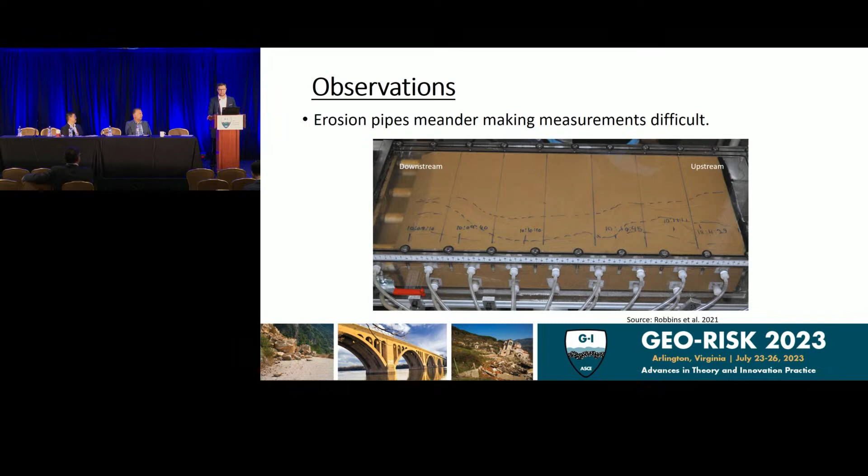The progression of the pipe is driven by those concentrated seepage forces, and this has long been known. Unfortunately, because the pipes tend to meander in both the field and the lab, it's been nearly impossible to measure what's happening directly at the pipe tips.

As a result of this, the methods that are typically used in practice are still based on the average hydraulic gradient across a structure, similar to the creep ratios of Bligh and Lane, with the difference being that the more recent developments have many empirical factors that try to account for everything that could relate the average gradient to what's actually driving the progression of the pipe, the hydraulics near the pipe tip.

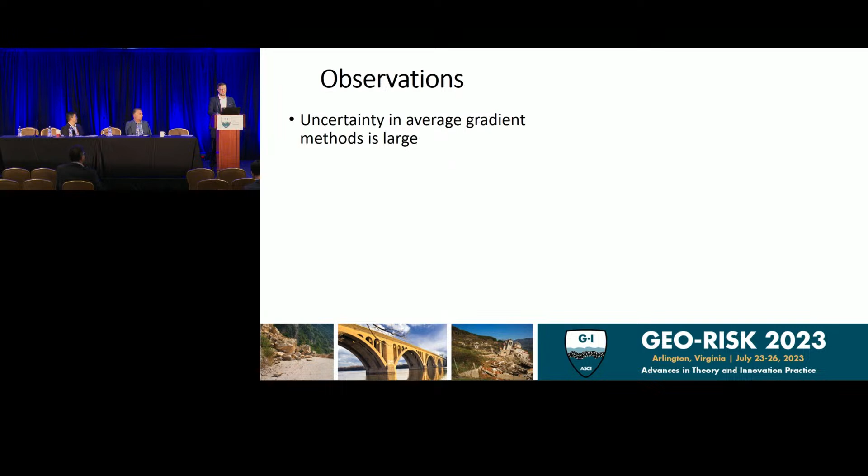That's not to say more sophisticated research hasn't been done. There's over 50 studies on numerical modeling. I'm just showing one example here, and some of them are extremely sophisticated, using multi-phase flow models, transient erosion processes, and even coupling with particle methods.

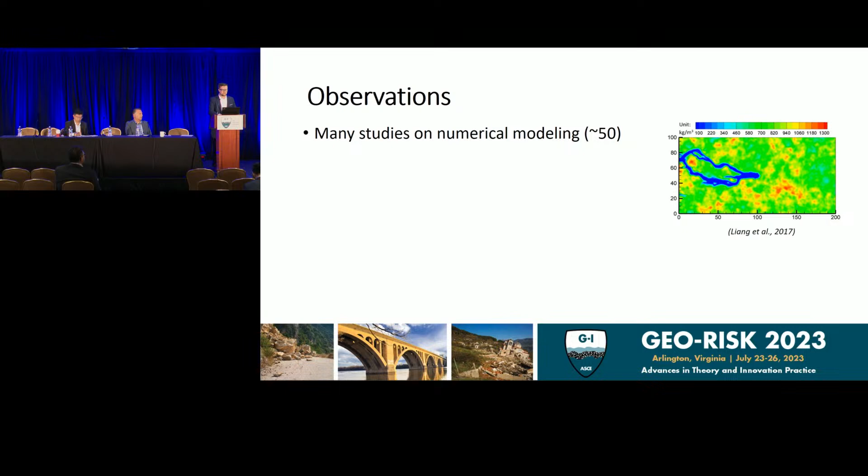Unfortunately, going through all of those studies, not a single study has used a measurable, spatially dependent erosion criterion. And like I mentioned earlier, this is important because if two investigators assess progression based on what's happening at the pipe tip, using two different distances, they're going to get very different answers.

Additionally, because there's not a measurable model parameter that can be used, most of those studies are calibrations, and reliable forward predictions are not really possible for every situation generically.

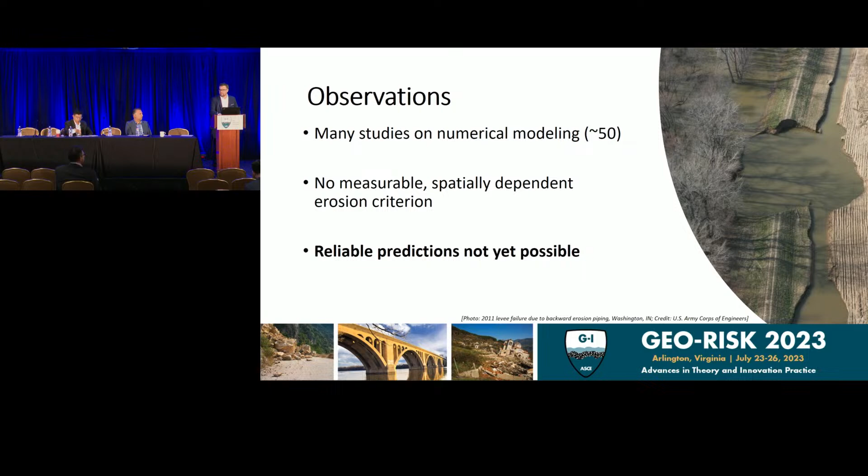I set out with my colleagues to develop a reliable predictive framework for backwards erosion piping that's based on measurable model parameters. To do that, we have to develop a spatial erosion criterion for the reasons we've discussed, come up with a way to measure and predict that model parameter or erosion criterion, develop a model that can use that to make predictions, and validate this approach. For the rest of this presentation, I'm going to walk through those steps.

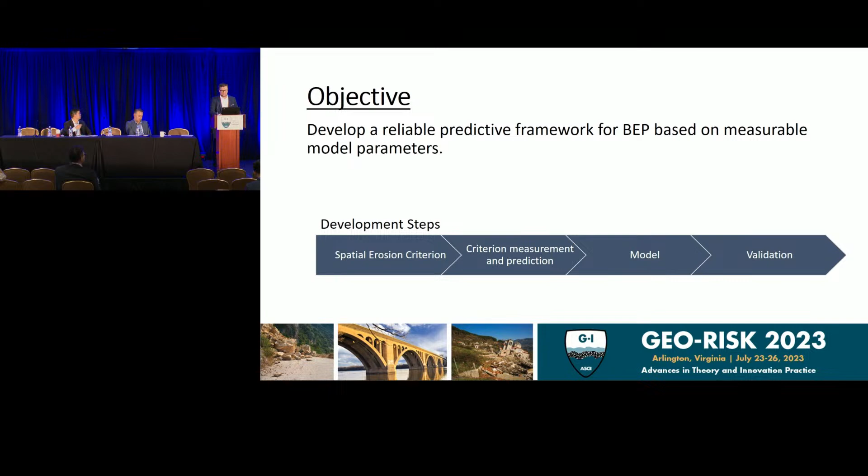So I've already mentioned why we need a spatial erosion criterion. Fortunately, we observed from laboratory tests that a critical head profile exists near the pipe tip. What I mean by that is, if we have a pipe through a soil sample, we can apply a load and nothing will happen. Even increasing that load, nothing might happen. But at some point, we will reach a critical head profile where any loading above that, erosion will occur, and any loading below that, no erosion will occur.

So we should be able to use this to model piping. Unfortunately, the critical head profile directly is not a super convenient form for modeling because it's relative to the head at the pipe tip, so in a model you would have to track that. For this reason, the concept of a critical secant gradient function was developed to provide a more convenient criterion.

2D conformal mapping solutions were used to develop an analytical expression for that critical secant gradient function, and it ended up being a pretty simple expression. The critical secant gradient at any distance x in front of the pipe tip is just equal to a constant divided by the square root of that distance. That constant can be defined using the head measured at any point on the curve.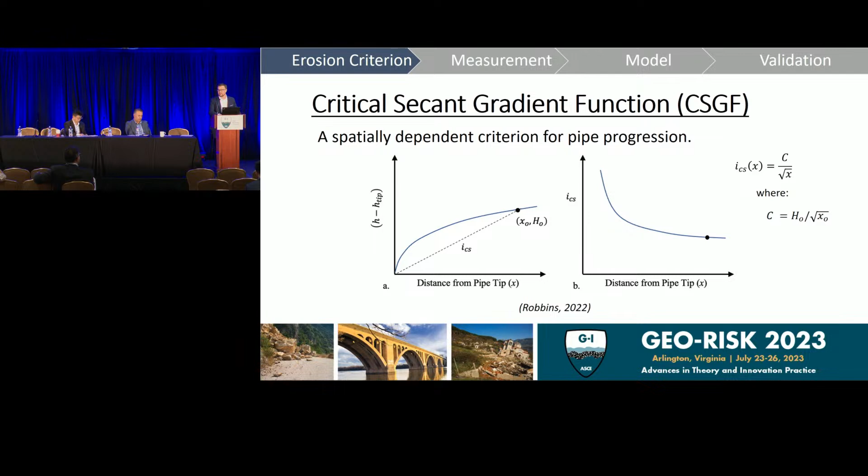The sample is subjected to a differential head until erosion starts to propagate, and the differential head is lowered when the pipe reaches the sensing zone so that the pipe will stop. At that point, we can gradually increase the head again until the pipe starts to progress, and the last stable head profile before erosion occurs is taken as the critical head profile.

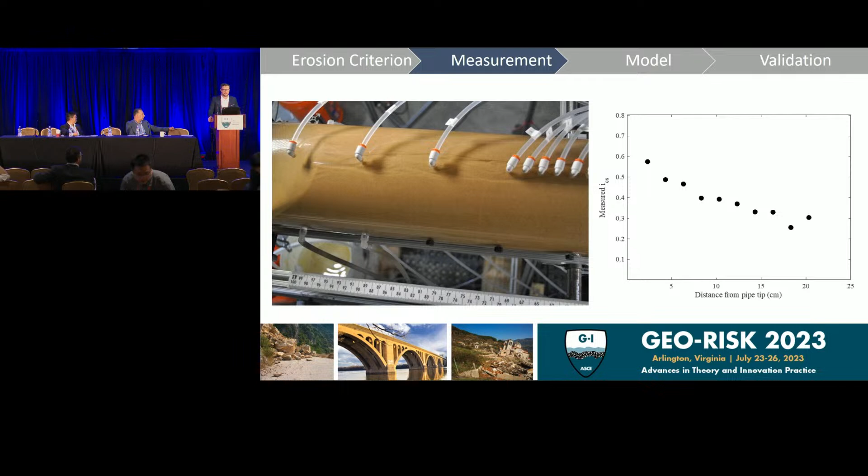These tests were run on 7 different sands. The first sand was procured just locally to test the device in Vicksburg. The other 6 sands actually came from the Netherlands and were used in some of the validation studies that I'll show you momentarily. The range of D50 on the sands goes from 0.15 millimeters to 1.4, and the range of the coefficient of uniformity goes from 1.3 to 3.7. So these sands as a whole cover the range of materials in the field we would typically be concerned about piping.

As you can see from these results, that 2D conformal mapping equation appears to match the measurements quite well, although there's a lot of questions remaining still about whether or not the cylindrical shape of the sample and that 2D equation apply in more general 3D situations in practice. And we'll take a look at that in the validation.

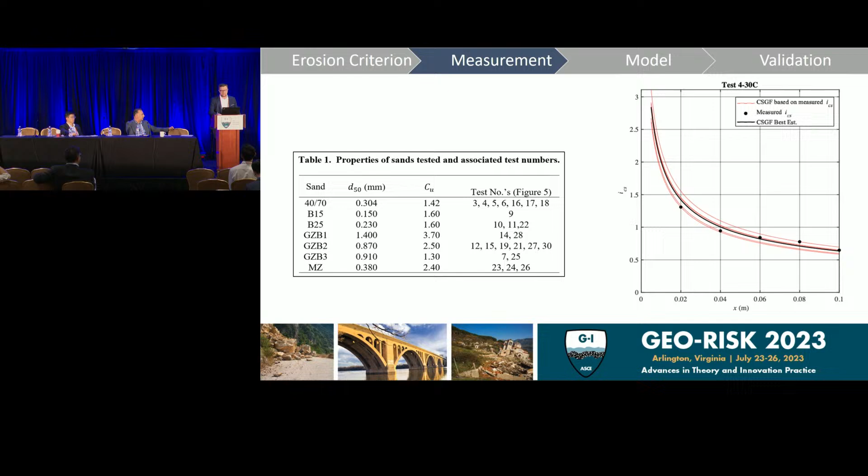For that best estimate curve, we get the C value, the constant that goes into the critical secant gradient function. And from the results of all of those tests, we were able to develop a predictive equation for the C value that's a function of the median grain size, the D50, the coefficient of uniformity, and the soil void ratio.

So now let's talk briefly about a model. I'm not going to go into all of the details, but in general, the model that was used was quite simple. It was a steady state model. You just see the steady state groundwater flow equations. And the Darcy-Weisbach equation was used to model the steady state flow in the pipe.

So we have two coupled domains. A steady state model was chosen because I'd like to start simple since we don't have something we believe in yet, and also because most of the experiments are conducted in a piecewise steady state way, so it's easy to validate that these ideas work using a steady state model.

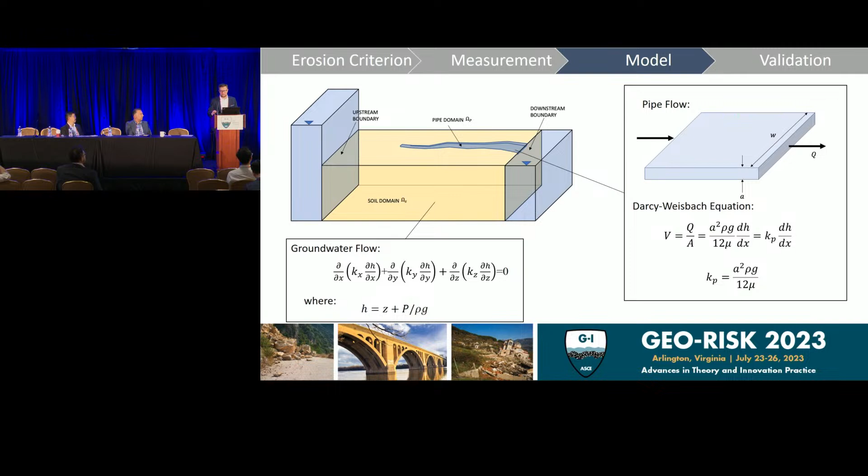The pipe was represented in the model using an equivalent hydraulic conductivity. That's what the K sub P is that's shown on the slide, and that just relates the pipe dimensions to the flow that we would expect through a 1D pipe with those dimensions modeled using the Darcy-Weisbach equation. So we're modeling the pipe as soil, but just making sure that the flow through the pipe domain in the model matches what Darcy-Weisbach equation would have yielded.

This is really convenient because we can use any steady state groundwater model. It's the exact same solution. We're just changing what we're integrating into the conductivity matrix over the pipe domain.

You can formulate that equivalent pipe permeability for different types of elements, just matching the geometry of the elements to the geometry of the pipe and making sure the flow quantities come out the same. Algorithms were developed for pipe widening and pipe deepening so that the dimensions of the pipes are automatically determined, as well as automated pipe progression.

I'm not going to talk about the widening or deepening—you can see my PhD thesis or papers for more information on that. But I will talk about the automated progression, because that illustrates how the critical secant gradient is used in a model.

For a minute, imagine we're looking at an element immediately upstream of the pipe. From your numerical model, the average gradient over that element is our best estimate of the secant gradient in the model, over some distance x in front of the pipe.

We can calculate the critical value of the secant gradient corresponding to that distance, and if the secant gradient in the model under given boundary conditions exceeds the critical value, the pipe will progress by switching that element from the soil domain to the pipe domain.

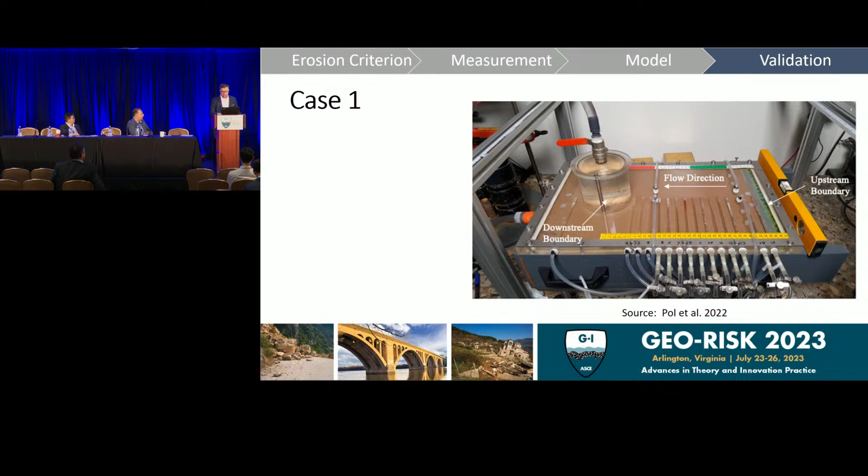This particular sand was one of the ones that we tested in the cylinder, so we have measured values of the critical secant gradient and measured values of the soil hydraulic conductivity.

This particular model was an excellent validation case because the pipe happened to pass under the sensors. This is showing the critical pipe geometry and position, and so we can use this to validate the hydraulics of the model and see if our assumptions are adequately representing what's going on in the pipe.

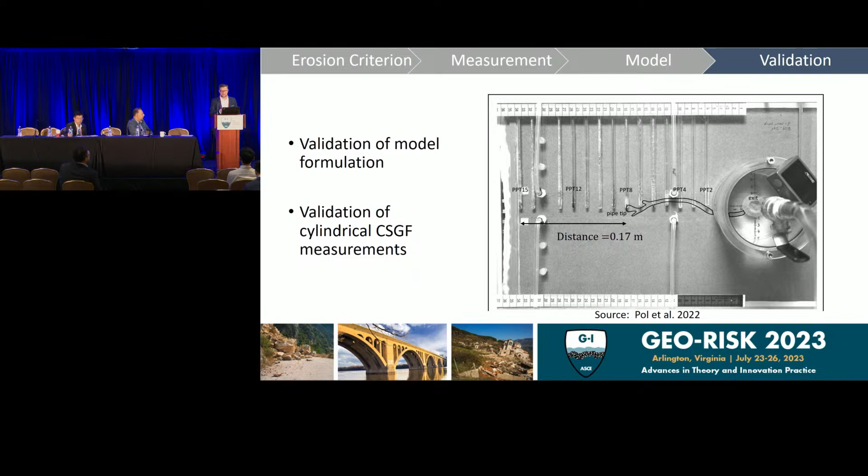And we can also use this to validate the idea of using the cylindrical lab test to measure the critical gradient function, because this particular experiment was more of a three-dimensional case.

This just shows the relatively simple finite element model that was built of that experiment. The pipe was set to the position that was observed in the lab, and the downstream and upstream boundaries were set to the heads that were measured in the laboratory.

Like I mentioned, we don't need the critical secant gradient function, but we did need the grain size, because that is how the depth of the pipe was calculated.

And here you see the resulting modeled head distribution across that sample as compared to the measured values. There were a few points in the pipe that were higher, but looking at the photograph, the pipe missed those sensors, which is why they're elevated. Otherwise, in general, it appears that the assumptions for the pipe hydraulic calculations are quite valid.

Additionally, based on this head profile, the C value in the critical secant gradient function was calculated for this experiment. The value from the three-dimensional box experiment was only 8% lower than the cylinder.

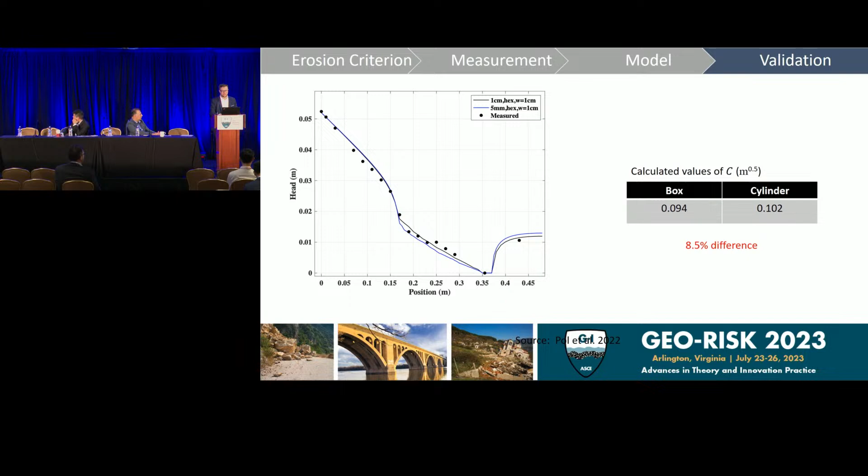This was good news, because I would expect that if the cylinder is biasing the determination of that function, the cylinder would have a lower value because it has less three-dimensional flow and convergence. The fact that the box was lower than the cylinder gives me some confidence that we might be able to measure it in the more convenient cylindrical shape to get values to use.

The second case is a similar experiment, but it has a layer of coarse sand in it. This is a good validation case because it provides more complex erosion patterns, and we can see if the piecewise steady state algorithms are capable of replicating those.

A couple things to note: the erosion pattern spreads out completely along that coarse sand interface before penetrating into the coarse sand in one spot, stopping, and then failing the barrier in another spot. That is actually what was observed in the experiment, and more impressively, the predicted head of 1.28 meters was extremely close to the experimental value of 1.3 meters.

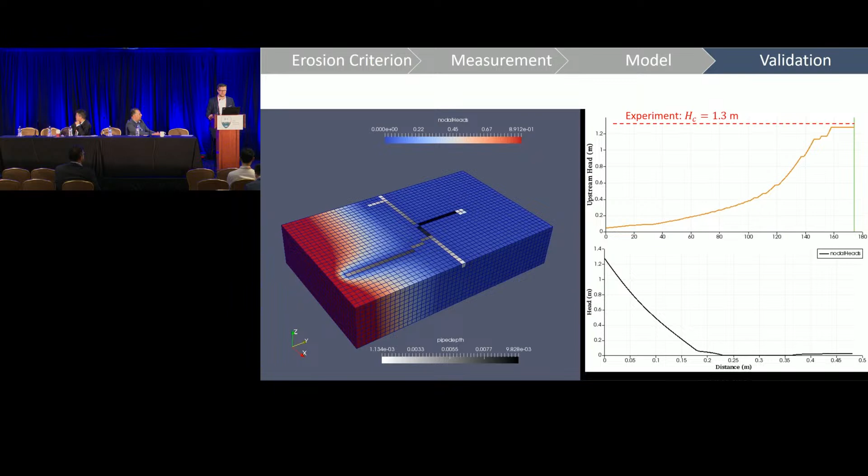This was using the measured critical secant gradient function and the measured hydraulic conductivity from the cylinder in this simulation. The last validation cases I want to present are larger scale.

These are over a meter in length. They were conducted by Rebecca Allan at the University of New South Wales. These are good cases for validation because they have different exit conditions. One test had a hole or slot, one had a plane, and one had a slope. That gives us different hydraulic patterns to see if this modeling approach is still working in a general sense.

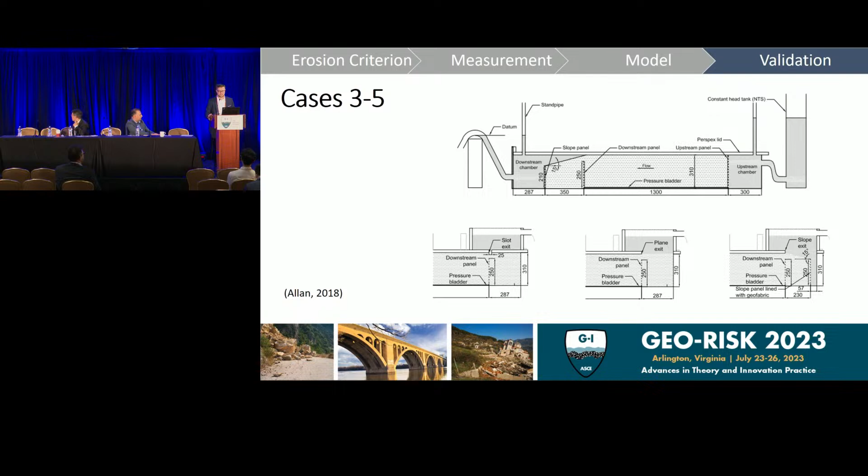For the model inputs, the hydraulic conductivities for the sands were reported in her thesis, so those were used directly, but I did not have any indication of what the critical secant gradient function was for those sands, so the predictive correlation I showed you earlier was used to estimate it.

So a few conclusions we can draw from this work. The critical secant gradient function provides a measurable, spatially dependent erosion criterion and appears to be able to reliably predict piping. Additionally, we can predict the critical secant gradient function from basic soil properties, so if we can't measure it, we have a way to estimate that in practice.

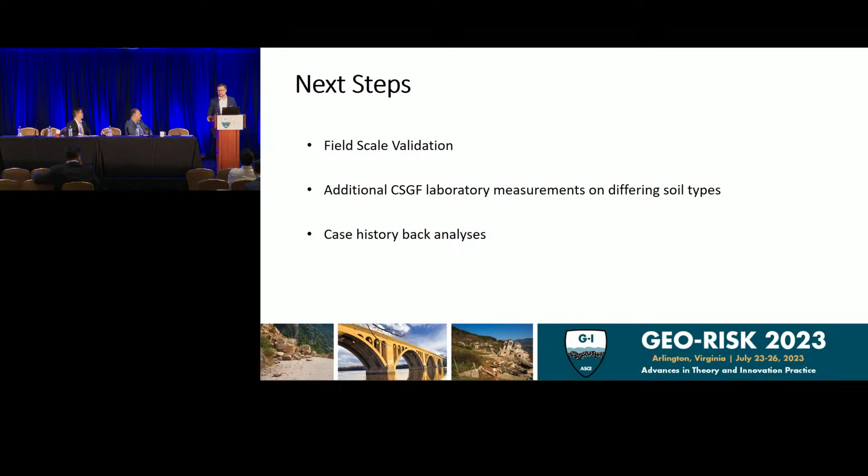Lastly, the preliminary validation studies are showing quite promising results. I'm not convinced yet that it works, though. So next steps that need to be taken: we need to pursue field scale validation of this approach. Additional measurements of the critical secant gradient function need to be made. And ideally, we'll have enough information to do back analysis of various case histories to convince ourselves that this is useful in practice given all the uncertainties that we encounter in the field.

Thank you for your attention.